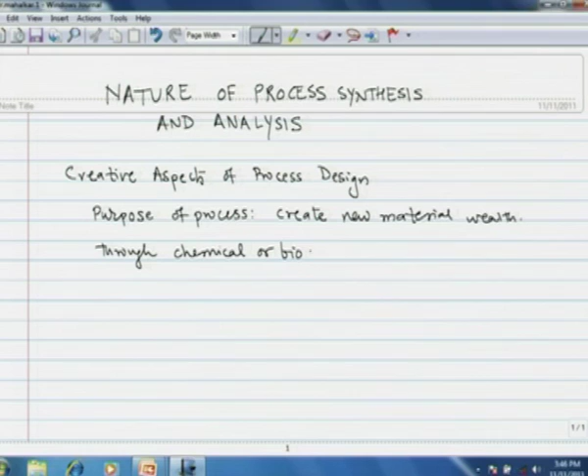Now let us first see the creative aspects of process design. The purpose of a process is to create new material wealth. This material wealth is created through either chemical or biochemical transformations of the raw material, or one type of material, to value added products.

Now, process design is about generating an idea and translating it into reality. Now, what kind of ideas can be generated when we try to design a process?

A process design may involve production of a purchased raw material for an existing process, or it may involve conversion of a waste product to a value added product, again in an existing process. This will increase the revenue earned by the process and its profitability. It may also bring down the level of emissions from the process.

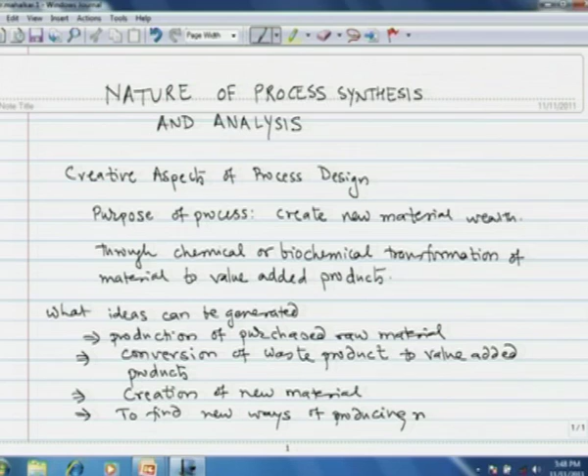The third type of idea could be creation of completely new material, that is setting up of a grassroot plant. Next type of idea could be to find new ways of producing existing material. The new ways may have advantages of reduced capital cost, reduced operating cost, more environmentally safe process, and so on and so forth.

Then the next idea could be to implement a new technology. New technology could have distinct advantages like reduction of capital cost, making the process very safe. An example of this is the caustic soda industry. The earliest plants of caustic soda were the amalgam plants, where sodium amalgam was prepared with mercury, and that amalgam was later hydrated to give sodium hydroxide. But mercury is poisonous, so even a small spill of mercury could give lot of environmental hazards.

Then the new technology came, that of a diaphragm process, where a diaphragm of a suitable material was used to separate the anode and cathode compartment, and that improved the process by basically eliminating the use of mercury. But the diaphragm process had problems of low electrical efficiency because of the back migration of ions. Then came the membrane technology. Membrane technology was a major leap in the caustic soda industry because it not only improved the electrical efficiency, but it also gave several other advantages such as very environmentally safe operation.

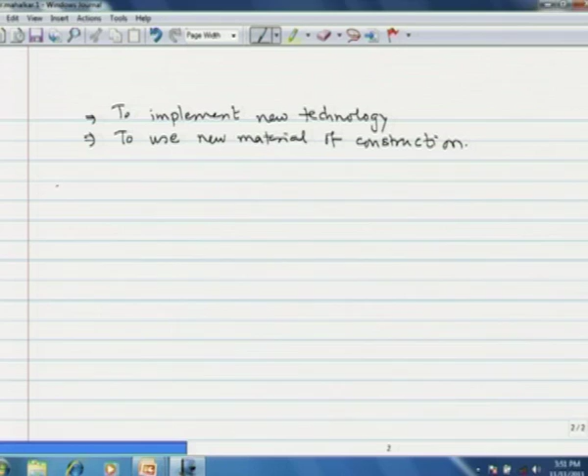Now, how does a process design evolve? Where is this idea generated? Idea is basically generated in laboratory. Whenever we are doing experiments with new material for new processes, idea is always generated in laboratory.

However, not all the ideas that are generated in laboratory could be transformed into a real process. So at research stage, the chance that an idea can be translated into a commercial process is typically about 1 to 3%.

Then, if the idea is sufficiently promising, we will take it to the development stage, where we will study not only the fundamental aspects, but also the applied aspects. That is what we know as a bench scale or pilot scale design of the process. And here, the chance that an idea could be translated into a real process is about 10 to 25%.

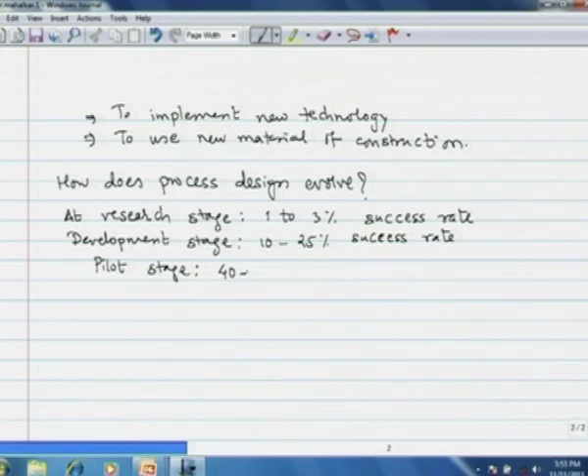Next, at the pilot stage, the chance that an idea or a process could be translated into a commercial process is about 40 to 60%. So you can see that very few of the ideas generated in laboratory ever become fruitful.

However, does that mean that we should discard most of the ideas? No. It means that we have to evaluate ideas at the research stage, not only at the research stage, but also at the development stage and the pilot stage. And therefore, evaluation process is a major aspect of process design, which we shall address mostly in this course.

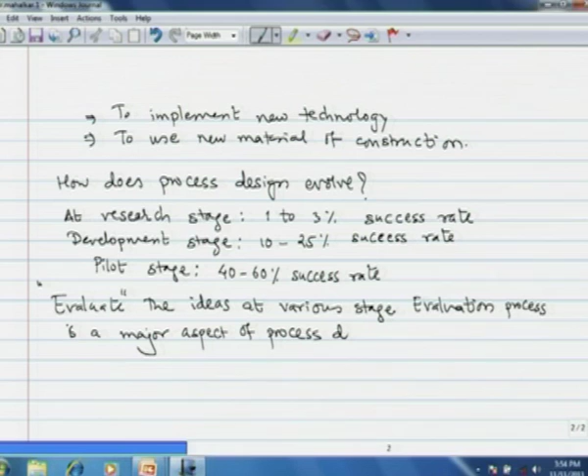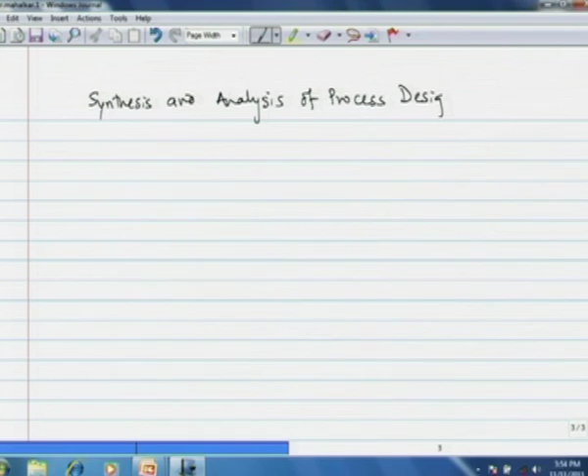Now, how do the problems of process design differ from another problem? The major difference is in terms of information that is available. Design problems are always underdefined, which means that very little of the information needed to design a complete process is available at the research stage.

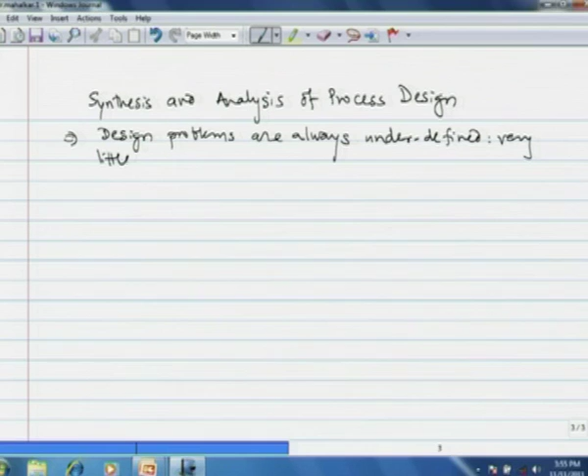Then how do you obtain the missing information? Missing information is either obtained by making guesses, or making use of heuristics or thumb rules, and so on and so forth.

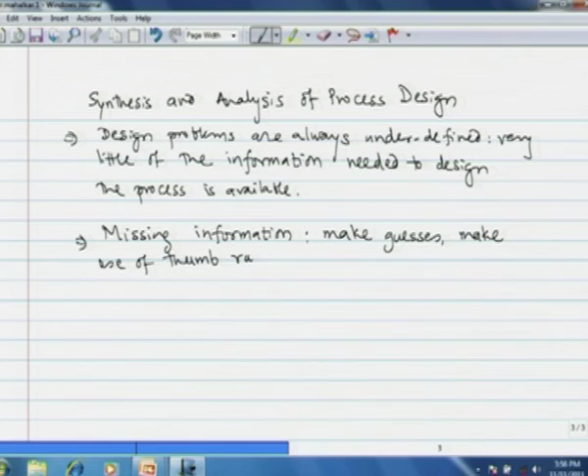Now, what is basically a process design? It is about selection of process equipment, the interconnection between the equipment, and then translating the raw material into the final product and also the byproducts. So synthesis activity is very much similar to drawing a painting. It is a creative process.

Now, when we start designing a process, we will see that every process alternative will give various alternatives of the process design, various variables of the process. It could be in terms of temperature, pressure, catalyst, conversion, or various variables of the process give rise to a large number of process alternatives.

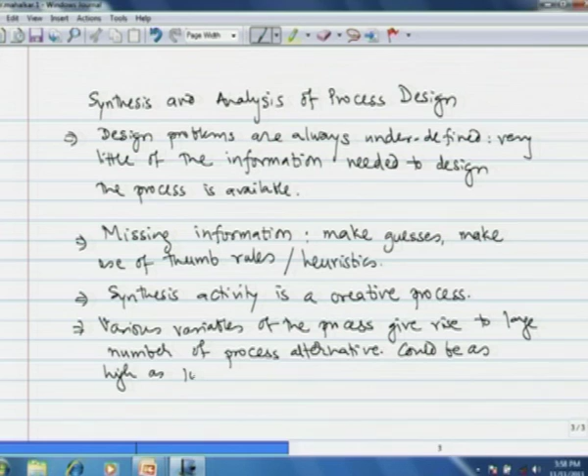Typically for a petrochemical process, the number of process alternatives could be as large as 10 to power 4 to 10 to power 6. Out of these process alternatives, how do we choose the best alternative?

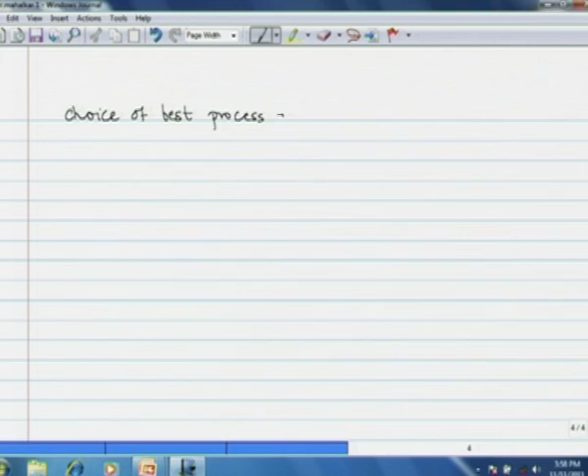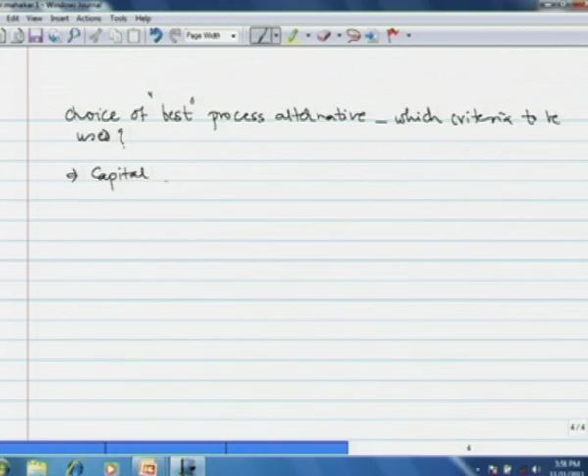What are the yardsticks that we will use for choosing the best process alternative? The first and foremost is obviously the capital and operating cost of the process. We would like to go for a process that has the least capital and operating cost.

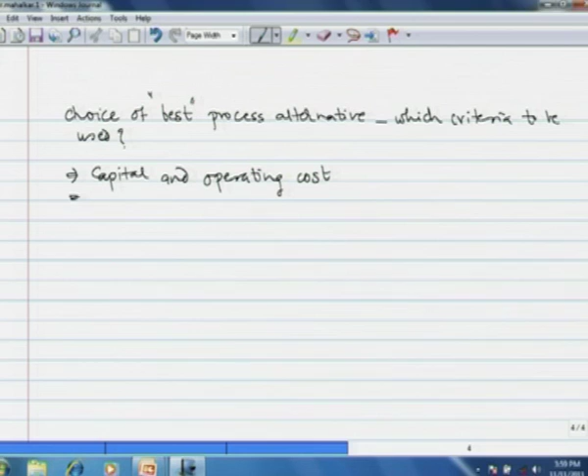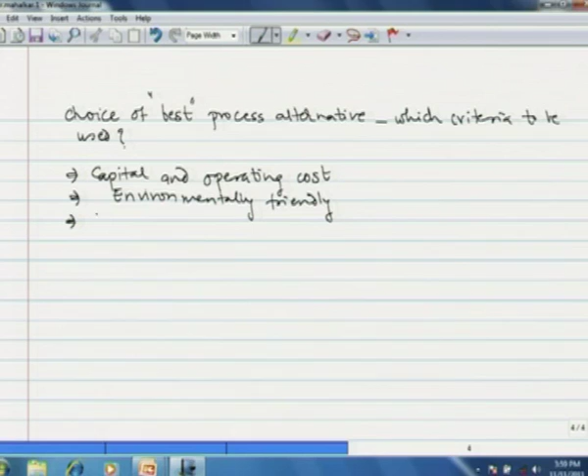Then it should be environmentally friendly. It should not give rise to noxious gases, solids, liquid emission. Then it should not use any hazardous chemical or hazardous conditions.

Then it should be easy to start up and operate. So these are various criteria that we will use to choose the best process alternative.

Now, not a single process alternative out of the 10 to power 4 or 10 to power 6 process alternatives could satisfy all the criteria that we want. Therefore, we are very likely to end up with the best few alternatives. That point we should note.

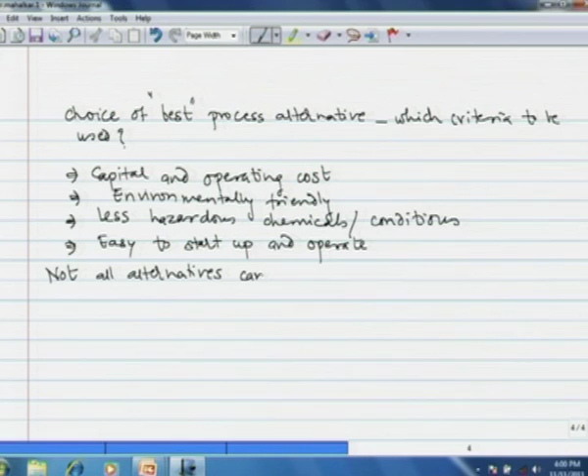Not all alternatives can satisfy all criteria. Therefore, we have to shortlist the few best alternatives.

Designing such a large number of process alternatives is also a highly time consuming activity. Now, to compare various process alternatives, is it necessary for us to design the process to completion, or can we design it only to a certain level where we can estimate the operating and capital cost and then we can use other criteria?

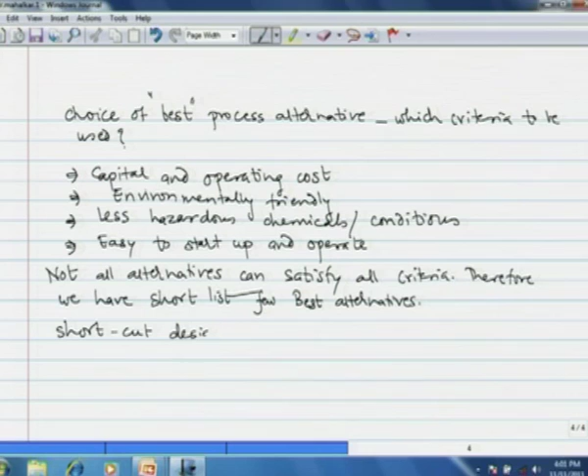So, shortcut design of a process is a powerful tool for comparing various alternatives.

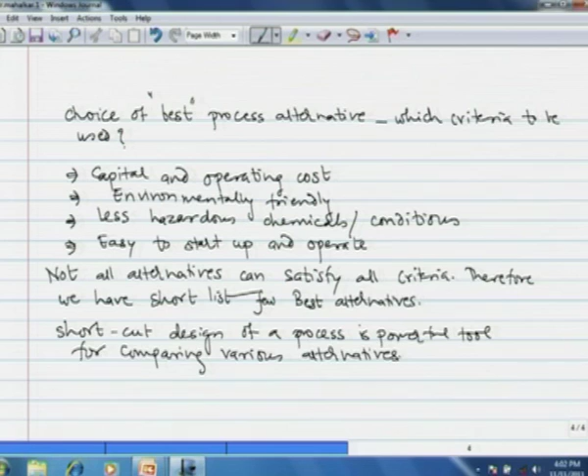Now, the approach of engineers could differ. How, as I just said, will you obtain the missing information to design a process? You have to either use your own experience, or you have to use some thumb rules, or you have to search literature where anyone has reported the same or similar process, and then make use of the best possible information available.

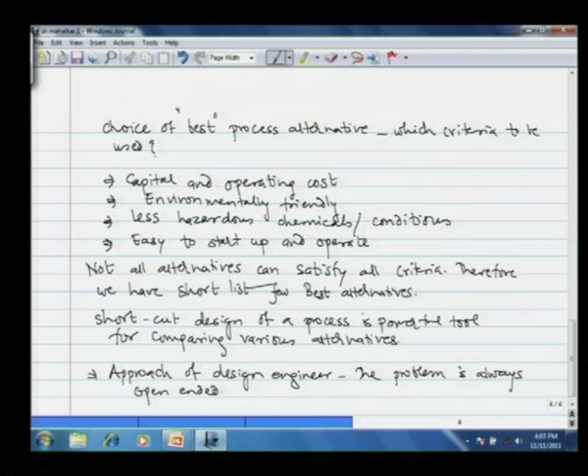But the problem is always very open ended. And thus, the guesswork or the heuristics that you apply will have a major impact on the accuracy of process design. And therefore, we would like to develop a methodology, development of a strategy or methodology for process design.

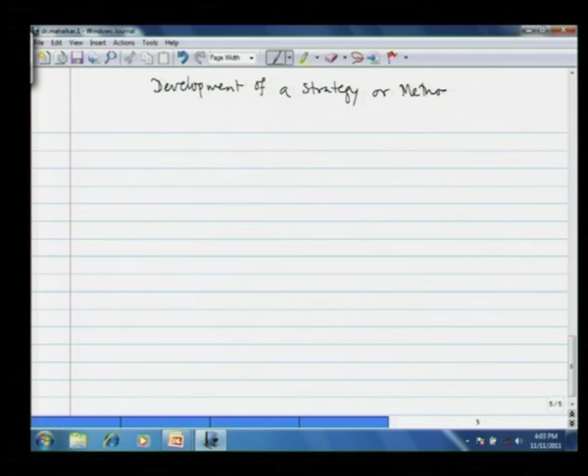And one such strategy is the engineering method. Engineering method is essentially process design through an artist approach. That is, you design a process in a very much similar way as a painter draws a painting.

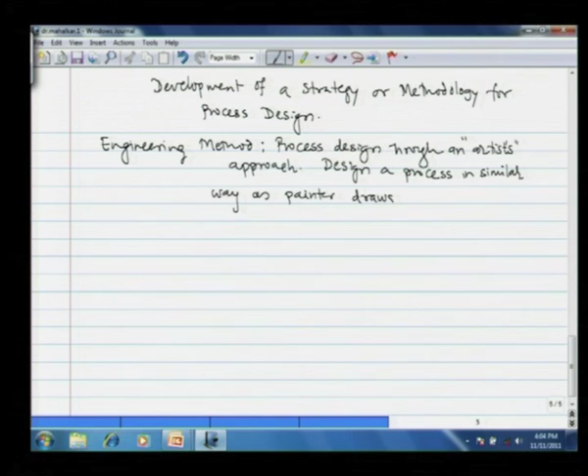That means, suppress at the initial stage all other information except the most essential. Most essential means basically in a process we look only at those equipment in the process which are cost expensive.

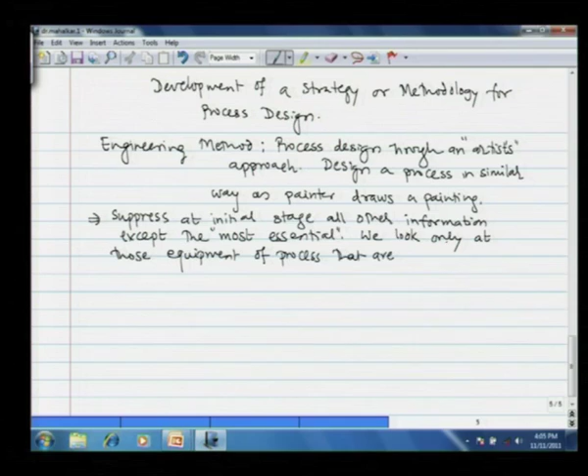Then we will see what are the economic trade-offs to reduce the overall capital and operating cost.

Introduce changes in the design only if they give significant improvement in any of the criteria that we listed earlier.

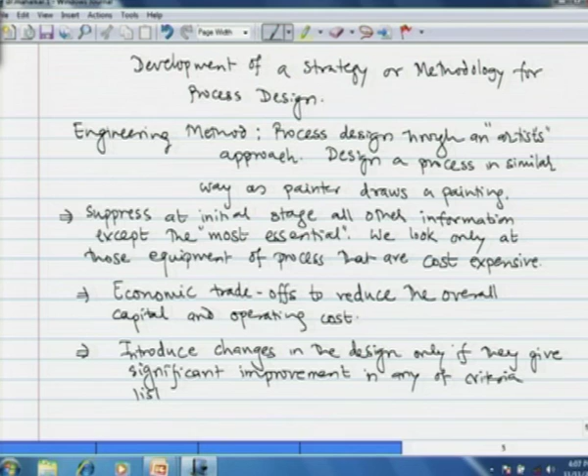So, if a design is evolving in this way, that we add greater and greater levels of detail as the process potential is promising, that means the addition of details essentially warrants a certain return. This is how the process will evolve.

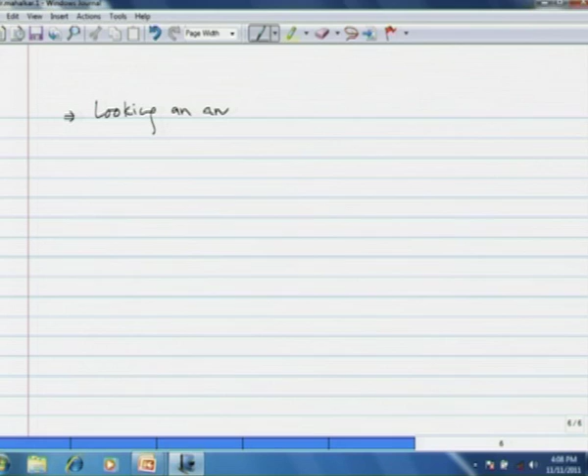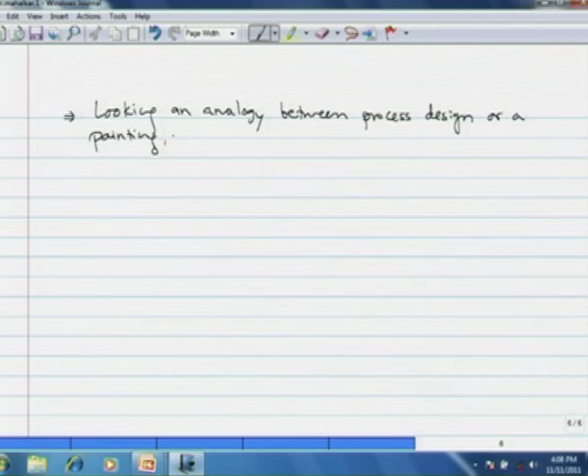Then what is the ultimate outcome? So, looking at the analogy between process design and art or a painting, we will say that process design is never complete. Process design can never be complete.

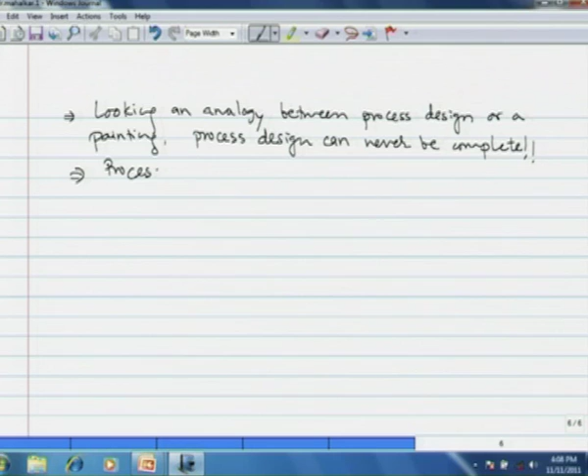Then, when we stop the designing of the process, it is when the addition of additional detail or consideration of additional detail of the process does not return significant merit. The process design ceases when addition of further details does not warrant significant return or significant benefit.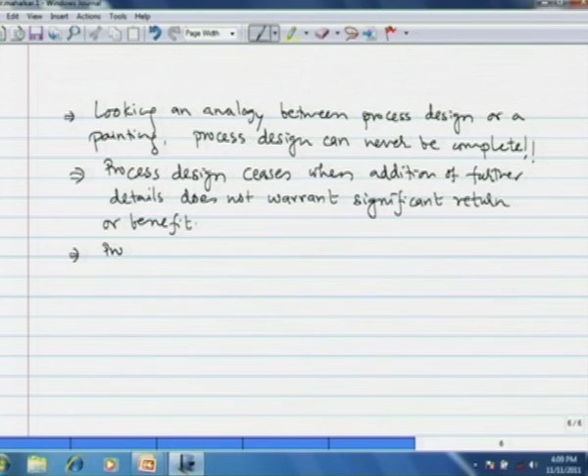And finally, I must point out that process design is a joint activity of scientist and engineer.

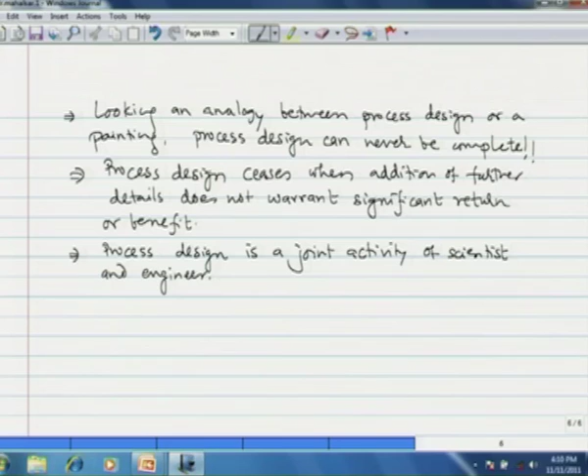As I said in the beginning, the idea that will eventually be translated into a process originates in a laboratory, where a scientist carries out experiments. Then an engineer would like to transform that idea into a process. However, the scientist and engineer should never lose touch with each other, because scientific input would improve engineering design, and additional factors that evolve out of engineering design would be a vital input for further scientific research. Now, let us see what are the levels of engineering design.

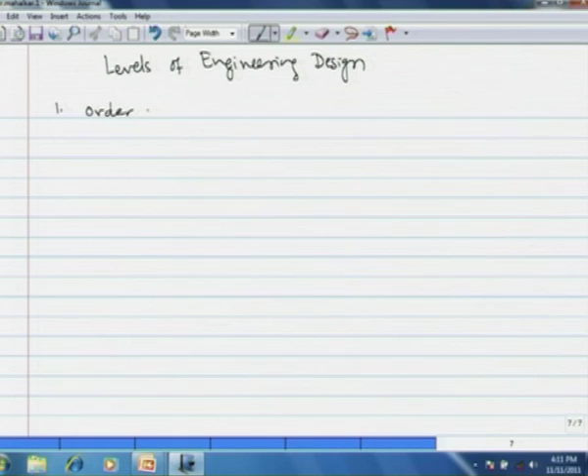At each stage of the design, we have to calculate the cost of the process. So let us see what these designs are. The very first level of design would be the order of magnitude estimate. For example, somebody wants to start a plant producing 10,000 tons per day of methanol. What is the typical cost involved? That is the order of magnitude estimate.

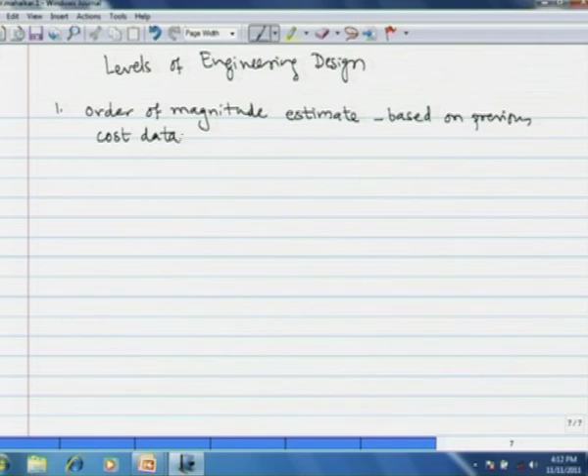This is based on previous cost data, and the accuracy of this estimate is about plus or minus 50%.

The next level of estimate is what is known as the study or factored estimate. This estimate is based on a broad process design, where we have knowledge of only the major equipments of the process, and here the accuracy is about plus minus 25%.

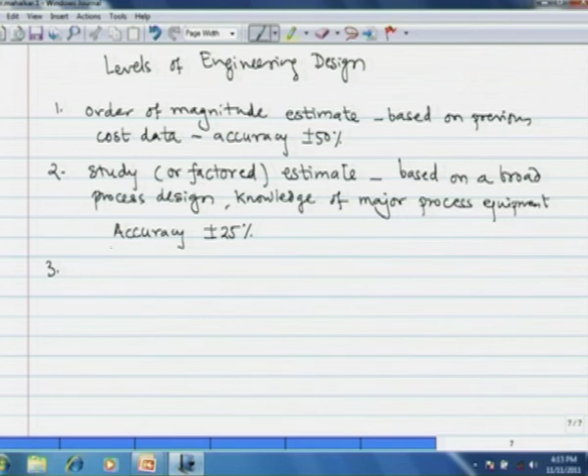The next level of estimate is the preliminary estimate, or what is also known as budget authorization estimate. This is based on more data, where we not only consider the major equipment, but also the utilities, energy balance, other small equipment, etc., based on sufficient data, and here the accuracy is about plus minus 15%.

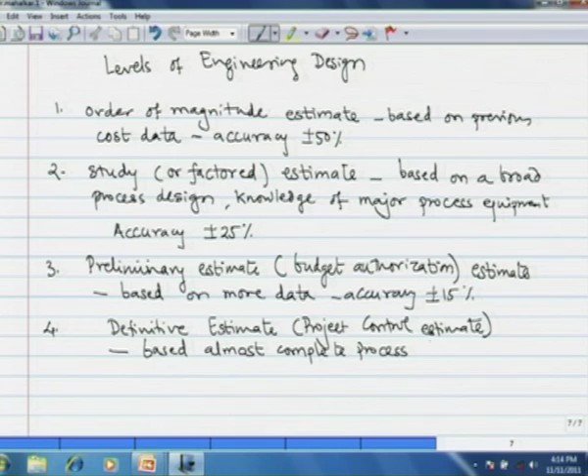Then the fourth estimate is the definitive estimate, or what is also known as project control estimate. This estimate is based on an almost complete process, but before it is handed over to a contractor, where the exact drawings and specifications are made, and the accuracy of this estimate is about plus minus 5%.

And the final estimate is what is known as the detailed or contractor's estimate. This is based on complete engineering drawings, site data, market surveys, and here the accuracy is about 3%.

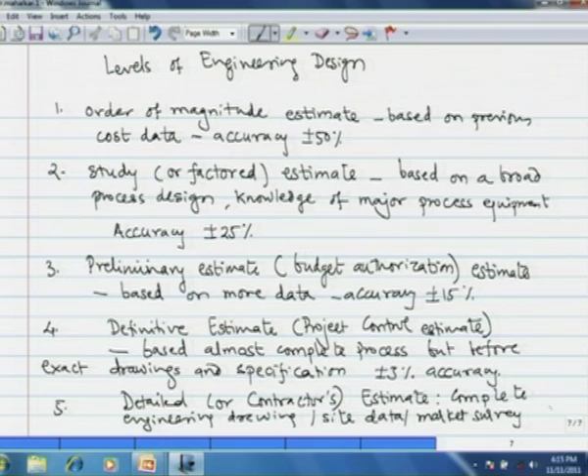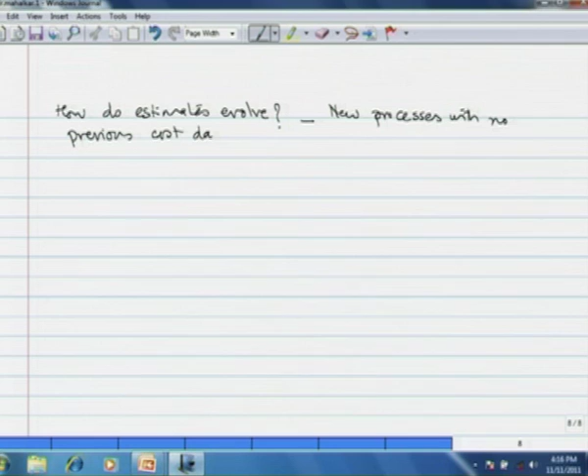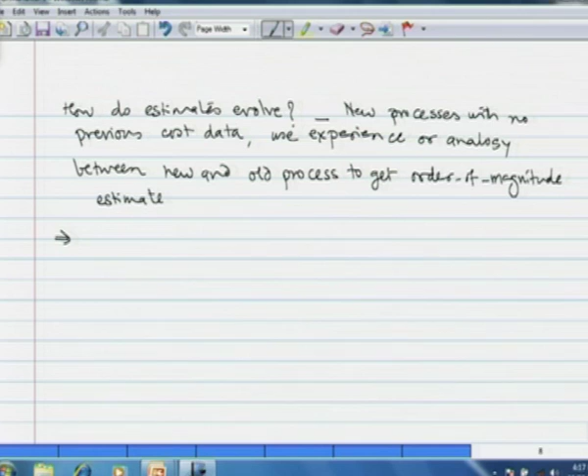Now, how do the estimates evolve? How would I get these estimates? For a very new process where previous cost data is not available, the easy way of getting the estimate is through an experienced engineer who can make an analogy between the new process and an older process and can make an excellent guess. But however, such an estimate is only an order of magnitude estimate. You cannot get more accurate estimates by this approach. Then how do I get an estimate, or design a systematic approach

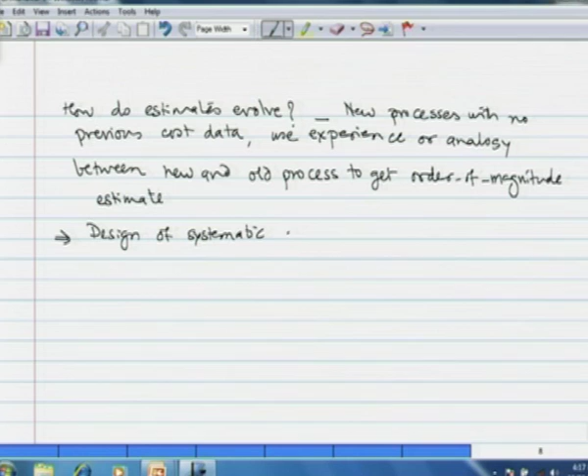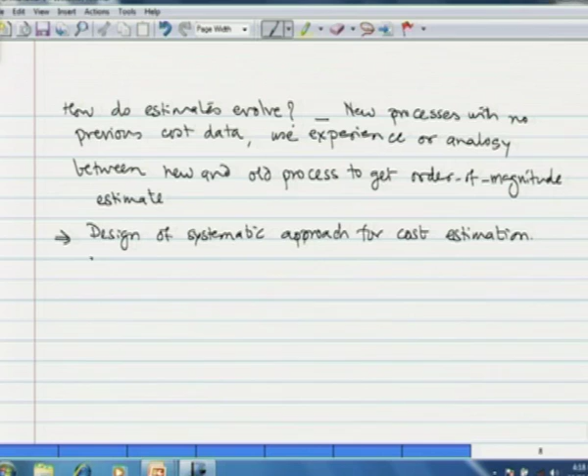that will end up in an accurate estimate of a process? Design of a systematic approach for cost estimation. This can be achieved only by designing a process through successive layers of details.

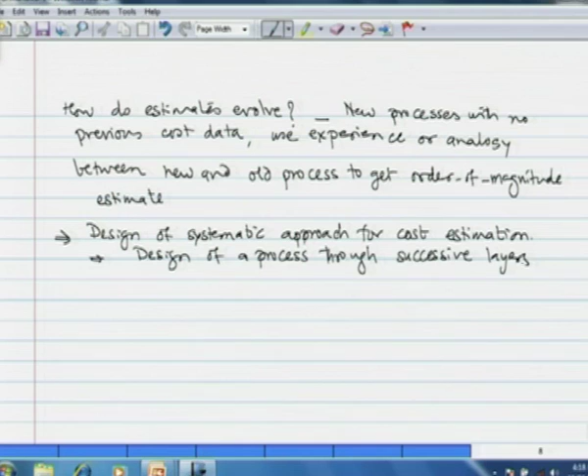But even with this, we are not going to end up with a single process alternative that would be the best one. As I mentioned before, the evaluation process is very important, and design of a systematic approach for cost estimation is essentially an evaluation of the process. Therefore, even with this approach, you will end up with as many as 100 best process alternatives. But as you will see, the number 100 is two orders of magnitude lesser than the process alternatives we had earlier, that is 10 to the power 4 or 10 to the power 6.

So evaluation is an essential or major activity, which is also known as screening of alternatives. Evaluation or screening of alternatives is a major aspect of process design, and this is the major component or major aim of this course.

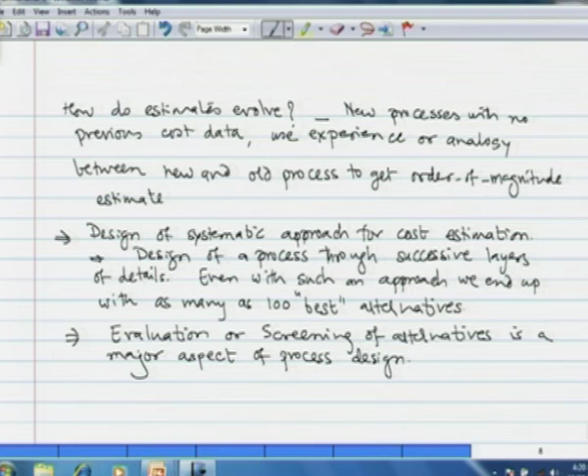Now we will see the hierarchical approach to process design. How do we develop a design step by step, or hierarchy? In each step we add greater and greater amounts of details, greater and greater amounts of information. So the idea is to develop simple solutions for process design,

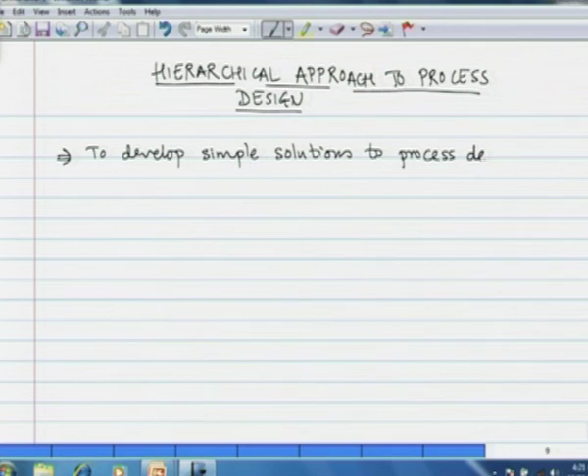and then add an additional layer of details. At each stage, we have to evaluate the economic potential of the process, and only then, if the potential is positive, do we go to the next stage.

As mentioned earlier, there are several criteria for evaluating a process, not just profitability. However, since this is about screening of alternatives, we will now use only the criteria of economic potential. To demonstrate the hierarchical approach to process design, we take the example of a petrochemical process.

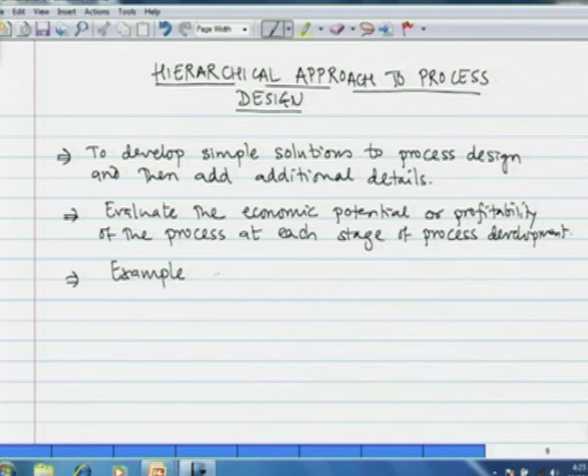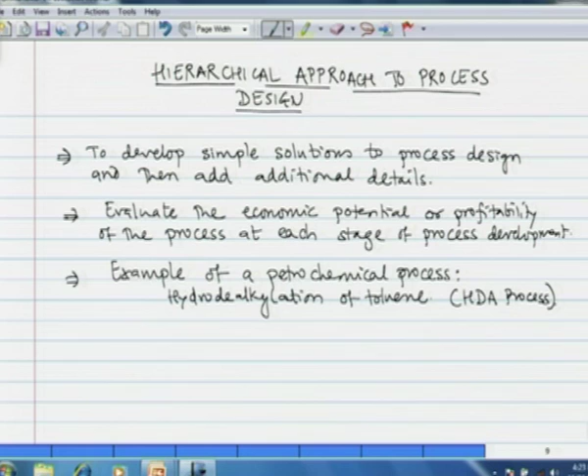Which is the hydrodealkylation of toluene, also known as the HDA process. What is the hydrodealkylation process? As I said, the idea is generated in a laboratory by a chemist. So let us first see the chemistry of hydrodealkylation.

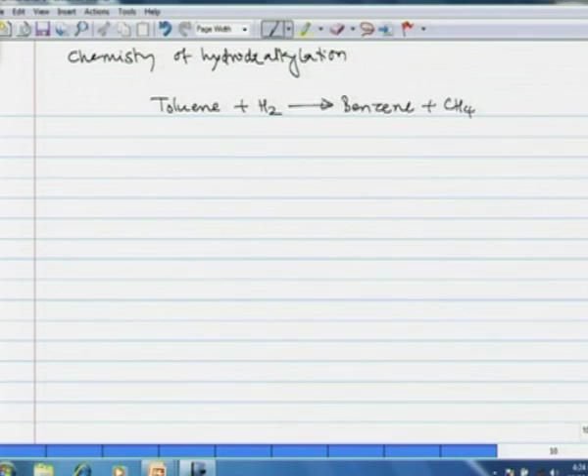In the hydrodealkylation process, toluene reacts with hydrogen to give benzene and methane. There is also a side reaction where two molecules of benzene combine reversibly to give diphenyl and hydrogen. So this is the basic chemistry.

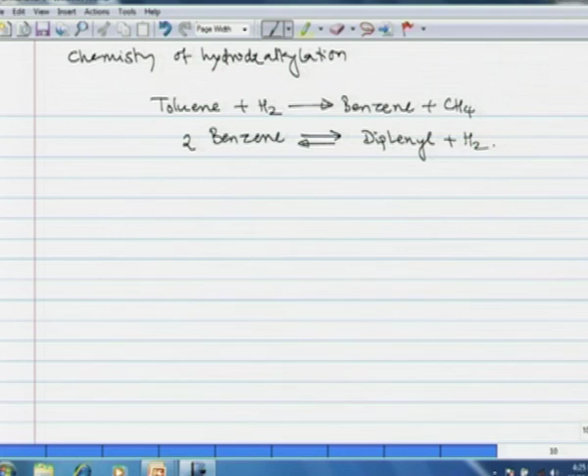This process is a vapor phase process. The pressure of the process is about 500 psi, pounds per square inch absolute, and the optimum temperature range is 1150 degrees Fahrenheit to 1300 degrees Fahrenheit. Now, how is this optimum temperature range determined?

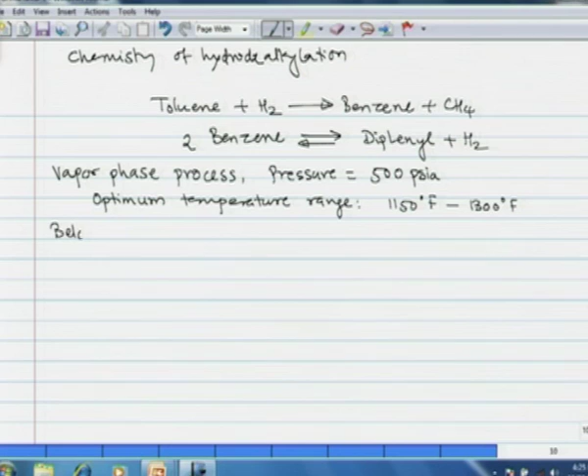Below 1150 degrees Fahrenheit, the kinetics of the reaction is very slow. And above 1300 degrees Fahrenheit, toluene undergoes thermal decomposition without getting converted into benzene.

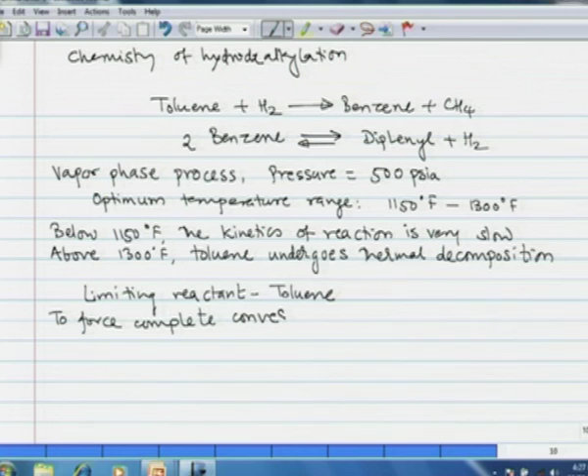Now, the limiting reactant in the process is toluene, and therefore, to force complete conversion of toluene to benzene, an excess of hydrogen is used. Typically, a molar ratio of 5:1 is used. Excess hydrogen fed to the process also has several other roles to play that will be evident later.

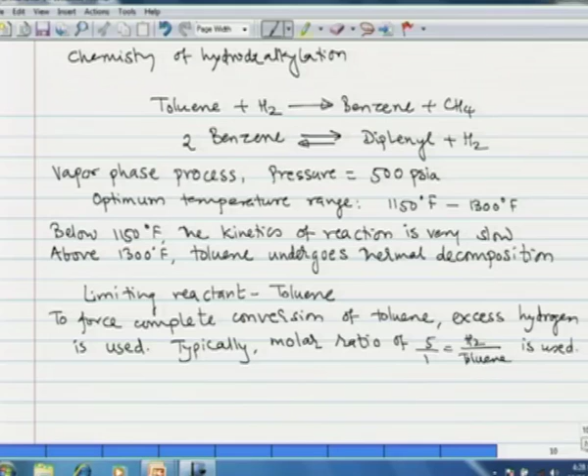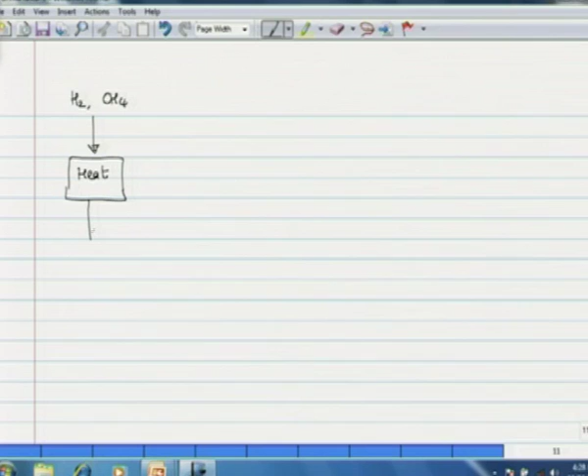Now, based on this information which comes from the laboratory, how do we start designing a process? Let us see how we can develop a very simple flow sheet for such a process. Both of the reactants have to be heated. We have one reactant in gaseous phase, hydrogen with some impurity of methane in it, because hydrogen is generated through steam reforming of methane.

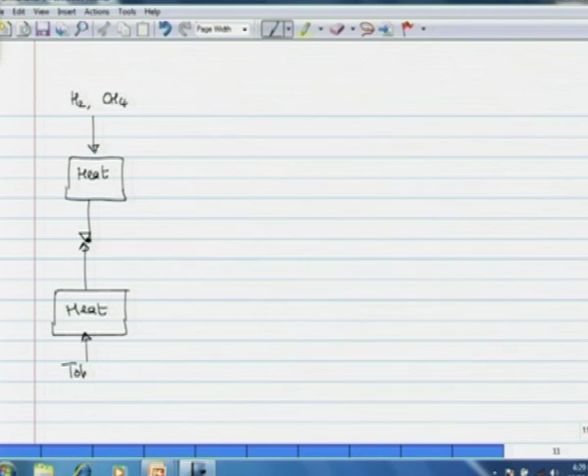This is heated and then it is mixed with toluene. Now, toluene is liquid at NTP conditions, so it not only needs to be heated, but also evaporated and then mixed here, and then fed to the reactor.

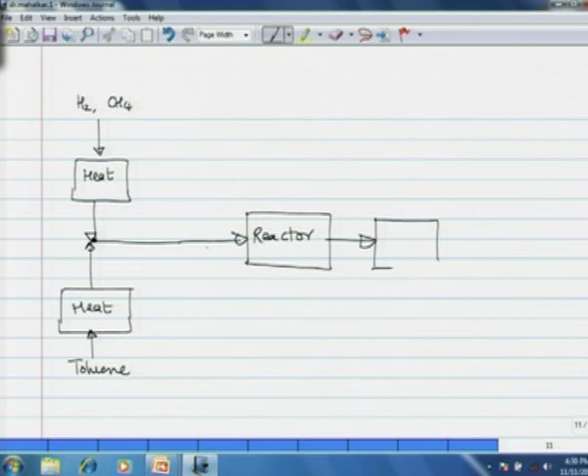Now, the reactor effluent, or the stream that comes out of the reactor, will contain the main product benzene, the byproduct diphenyl, unconverted hydrogen, methane which is an inert impurity, and also unconverted toluene. This mixture is at a temperature between 1150 to 1300 degrees Fahrenheit, so it contains a lot of energy.

Now this mixture has to be first cooled, and then it has to be expanded in a flash drum where the pressure is reduced. In the flash drum, benzene, toluene and diphenyl, which are basically heavy hydrocarbons, will condense, and hydrogen and methane will still be gases.

So two streams emerge out of the flash drum. One is the gas stream which contains mainly hydrogen and methane, and then a liquid stream that contains benzene, diphenyl and toluene. Of course, hydrogen and methane will have some vapor in it of both benzene and toluene. Similarly, in the liquid stream that is emerging, there will be hydrogen and methane dissolved.

Now, how do we separate these components? How do we withdraw the main product? Let us see the liquid stream first. The liquid stream is first fed to a stabilizer column where it is heated and the dissolved gases are taken off.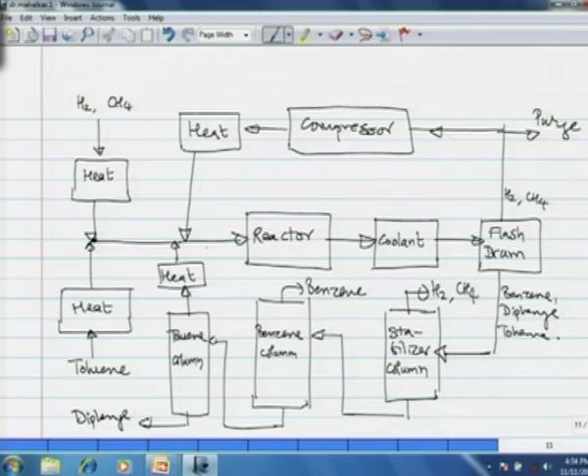Therefore, we use a purge stream. A purge is essentially throwing off some part of the unreacted gas. The remaining gas is then compressed to restore pressure to 500 psi. Then it is also heated and mixed with the fresh stream that is entering the reactor. So this is the basic flow sheet that we can draw from the information that has emerged from a chemist.

Now, in the next lecture, we shall see how we can simplify this flow sheet, decompose it into its simplest form, and then successively add layers of detail until we eventually end up with a complete process design.